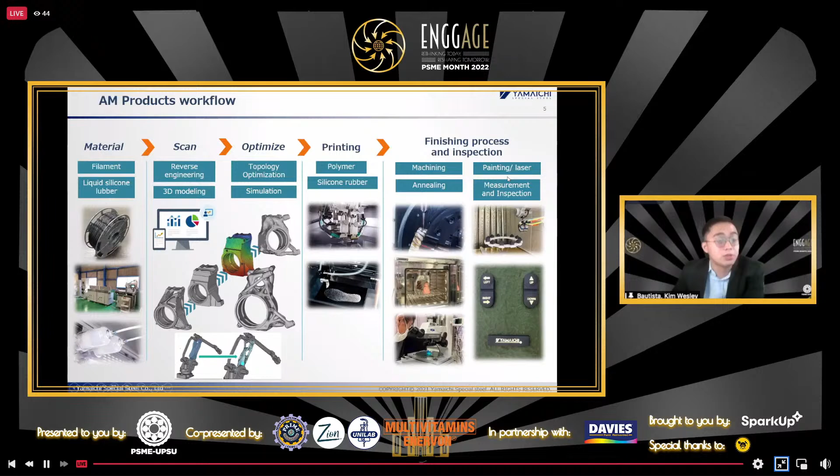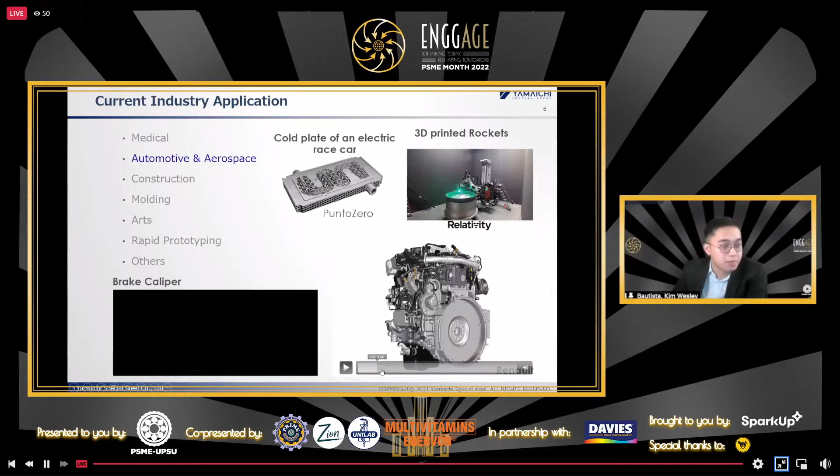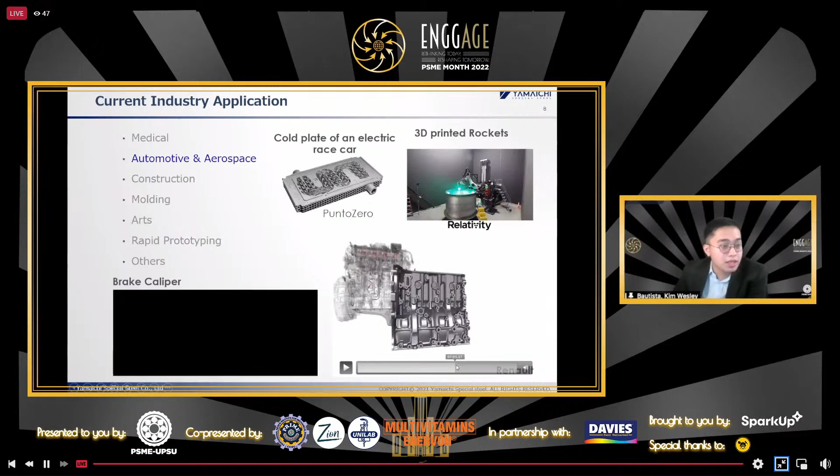For example, this part here, with 3D printing they got 18% weight reduction. This one got 42% weight reduction. This one got 36%, and this one also 36%. They also consolidated parts, from 80 parts integrated into one, and here from 45 integrated into one. So the total weight reduced is 120 kilograms and the number of parts reduced is 200.

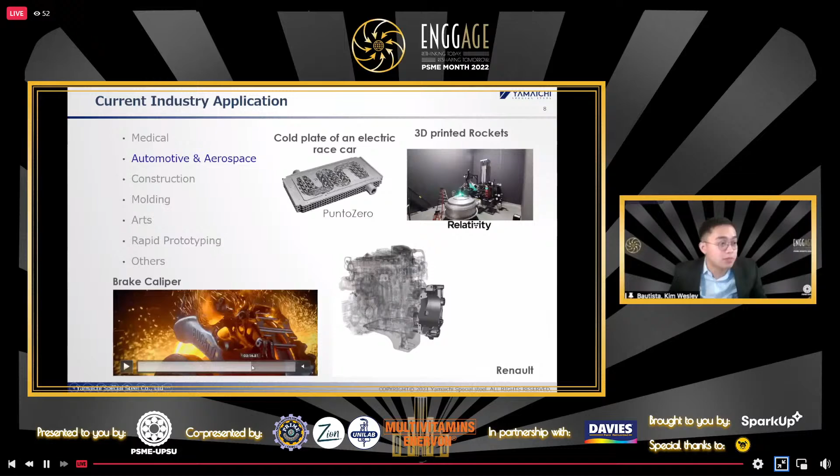Next, for construction, there are companies now exploring 3D printing for houses and bridges.

For molding, this mold has been explored with added cooling channels. Why do we want to add cooling channels to the mold? Because we want higher heat transfer. In molding, the part is subjected to very high temperature, like around 300 to 500 degrees, you pour in molten metal, then cool it down to 80 degrees. We want that process to be fast so it's more efficient, so the mold can produce more parts per certain amount of time.

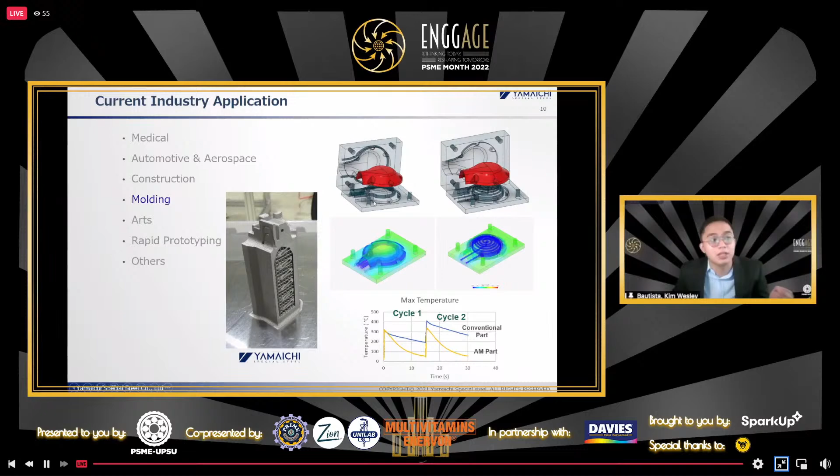Next, because it's easier to manufacture using additive manufacturing, there are also artists whose artworks are 3D printed.

For others, this is a past project of our company. There was a part in their assembly line where the assembly time was very long, like 18 hours. Our company approached them to reduce that assembly time. What we did was reduce the number of parts, from 63 parts down to just 7 parts, and the assembly time went from 18 hours down to just 8 hours.

Next is these speakers. They have ridges at the back, a wave pattern designed in such a way that it can only absorb specific frequencies.

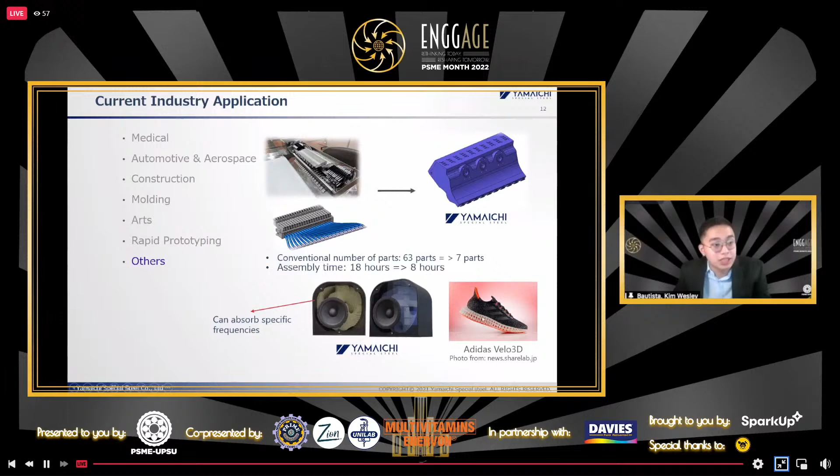Next, why is additive manufacturing different? You can compare here traditionally made versus AM parts. If you observe both, you'll see similarities among the AM-made ones. In fact, it's very obvious when a part is an AM part.

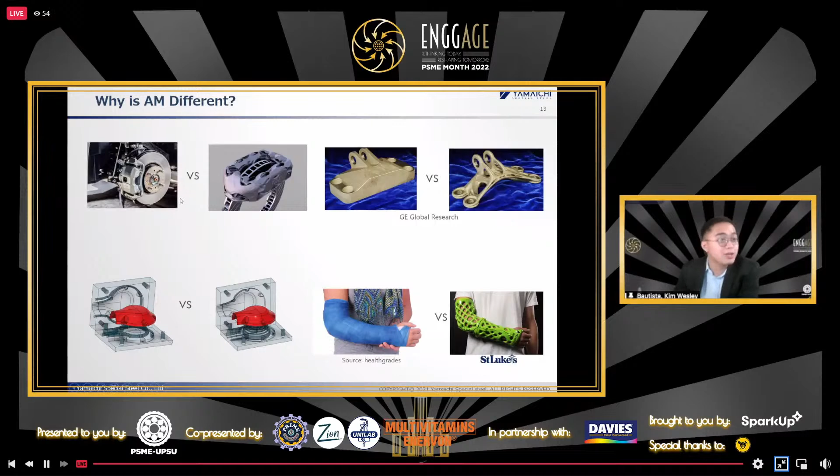Why is that? AM usually has more complex geometry, while traditionally made parts usually have simpler shapes. Why is that? Because in AM we just add material, we're not limited by tooling. So in short, AM gave us design freedom. For example, if you're playing games, it's like additive manufacturing unlocked items that we can now manufacture.

Next, while AM gave us design freedom, there are still some considerations we need to note when designing parts. For example, the printing angle should be lower than 45 degrees so it doesn't create supports, so supports aren't needed. What I want to show here is that there are still some considerations in designing a part. Of course, these rules, these considerations, are not true for all printers, because the development of 3D printers is very rapid nowadays.

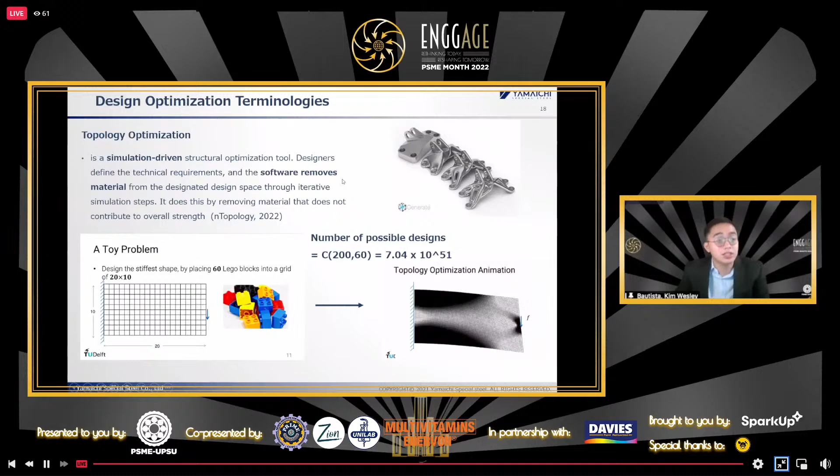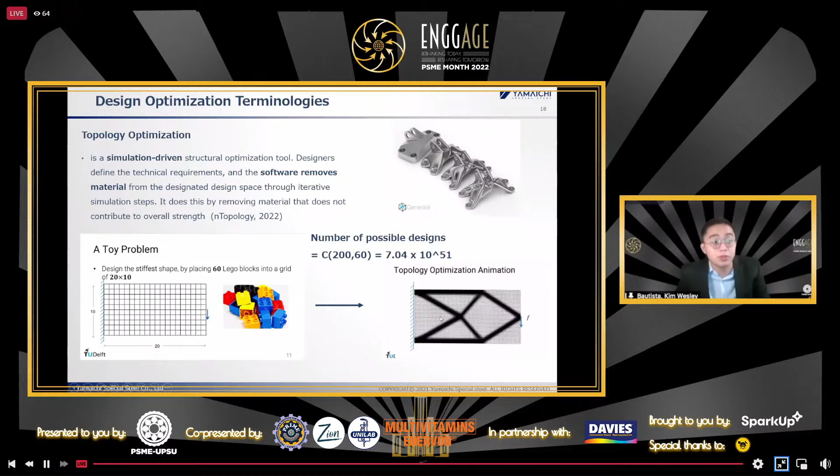So next is lattices. What are lattices? Lattice structures are repeated patterns that fill a volume or conform to a surface. In engineering design, lattices are cellular materials often inspired by nature, consisting of beams, surfaces, or plates that fit together following ordered or stochastic patterns.

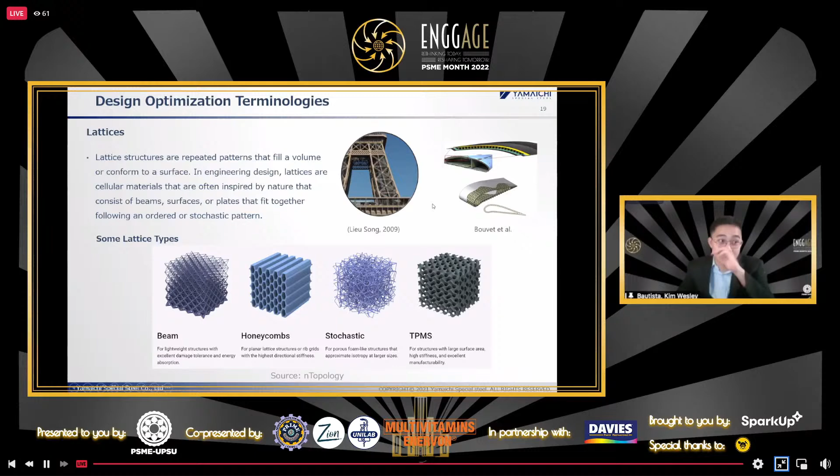So here is our design optimization workflow in our company. When we have a client, usually if they just want to optimize, we start with the CAD they provided. Sometimes we need to create it from scratch. So for example, we already have the CAD, and after that we need to optimize it using the concept I discussed a while ago. So we do design optimization, and from this part, we will lightweight it based on any requirement or specification the client wants.

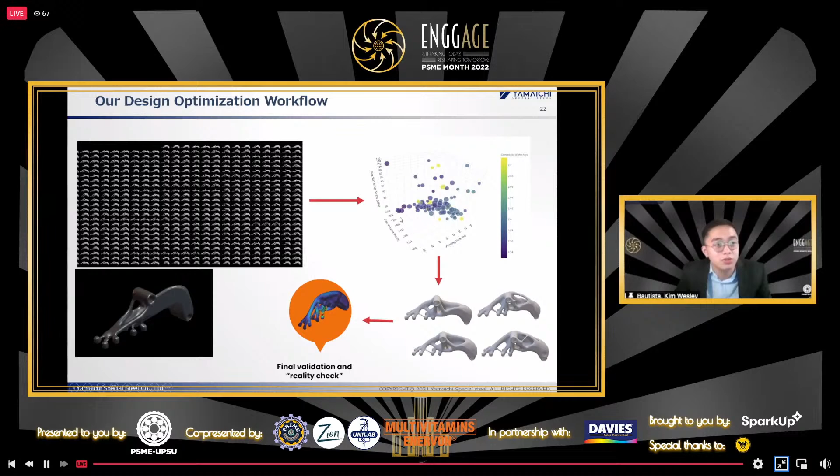So next naman, some samples lang. So ito naman ang gusto natin is to lightweight the design using topology optimization.

For example, may client ka and ang request niya, gusto niya ng robot arm mas mabilis. So dalawang way lang yon para magawa yon. One is to either lakasan mo yung power input mo, of course. Pag nilakasan mo yung power input mo, bibilis talaga yan. Or two, pwede mong i-lightweight tong material na to.

For example, ito lang yung pwede nating i-optimize na part. So ito ay sa n-top. Kailangan mo munang i-mesh yung part mo, and then you need to declare your boundary conditions, kung ano ba yung forces mo, saan ba siya constrained.

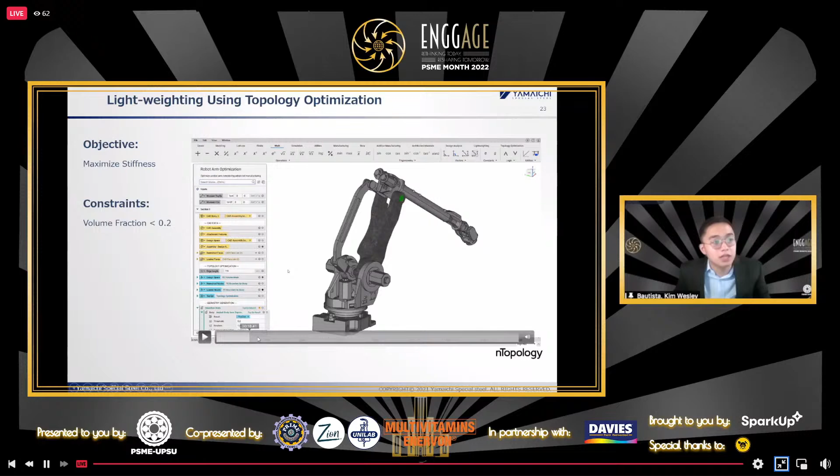At saka after that meron ka ng results. Of course magra-run in a while yung software mo, and then after that magkakaroon ka na ng results na ganito, most likely magiging ganito yung itsura. Makikita mo na maraming material yung ni-remove automatically.

Makikita nyo kung gaano na-reduce yung volume nung part natin. At saka, of course, in every optimization naman na technique, kailangan mong i-post-process yan.

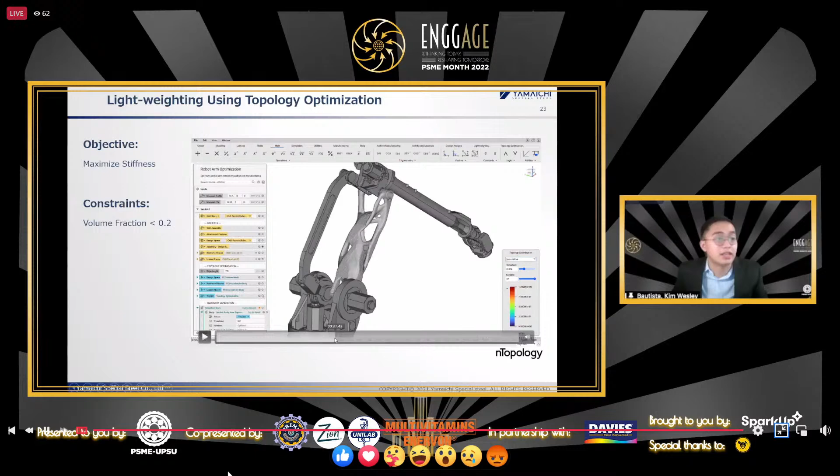So sa case na to, ma-observe nyo na very rough yung part. Kailangan nating i-smoothen yan para less yung mga stress concentrators natin. Ayan na siya.

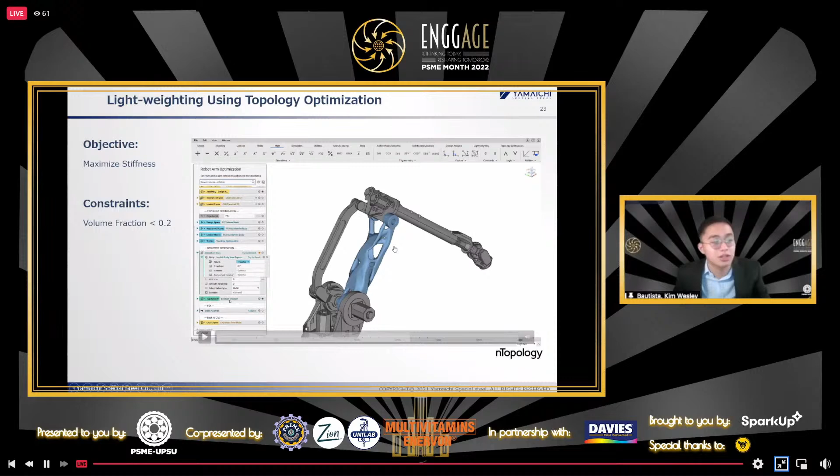Itong part na to, originally, 54 kilograms siya. Then, after optimization, I think naging around 22 kilograms na lang siya.

At saka, of course, meron kang result, pero hindi mo sure kung pasok ba sa design requirements mo. So after that, you need to do some simulations. Check lang yung deformation, check yung stresses. After that, ready for export na siya, or pwede na rin i-3D print kung hindi ka na magpa-final validation and testing.

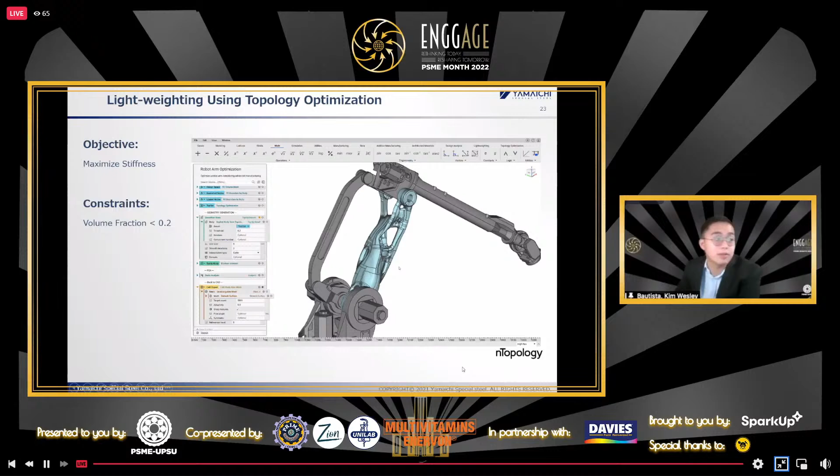So next naman is, ang gusto kong pakita dito is the concept of using fields to drive your designs. For example, meron kang isang bike seat.

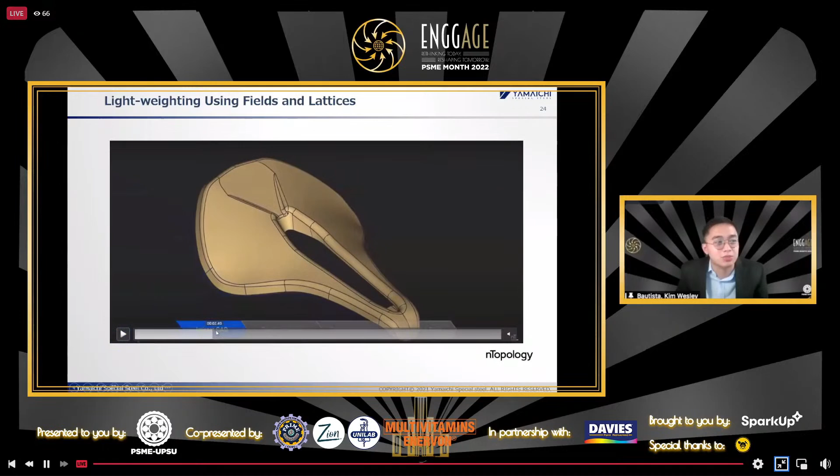Gusto mo ulit i-lightweight. At ang initial na gagawin is to do simulations kung ano nga ba yung mga stresses mo, para alam mo kung saan yung part na pwedeng bawasan or pwedeng modify. So here, ito yung results mo.

Dito, kitang-kita kung saan concentrated yung stresses. I'm not sure if this is stresses or strains. So ito yung results mo.

At gusto mo gamitin yan to drive your design. Sa software na ito, madali lang siyang gawin. Pwede mo siyang parang i-code na, for example, if your stress is this high, ganito yung corresponding na gagawin mo. If your stress is low, ganito yung corresponding na mangyayari.

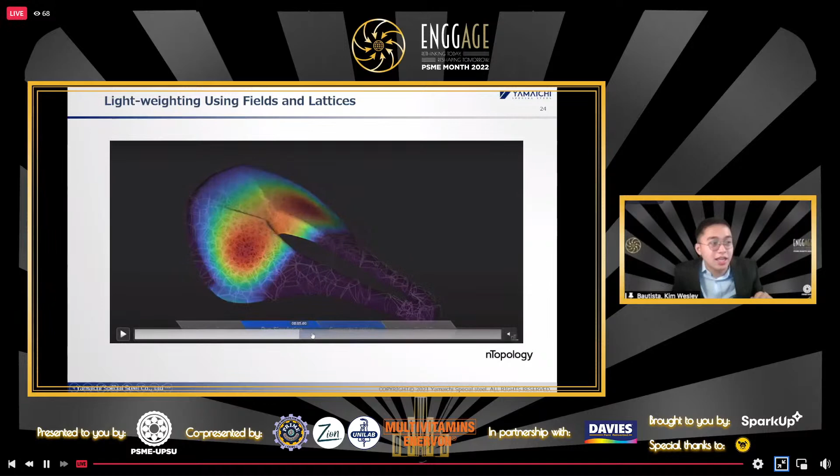So sa case na to, nilagyan niya ng lattices yung bike seat. Dito parang yung code natin, if high stresses, high density yung lattices mo. If low yung stresses mo, low density yung lattices mo. Bakit ganun? Of course, pag high stress, mas kailangan natin ng material doon na magsusupport.

So ayan yung itsura niya. Kitang-kita dito na yung high stresses, mas maraming material compared dito na low stresses. At saka you need to post-process it para mas maayos. So ito na yung final part mo.

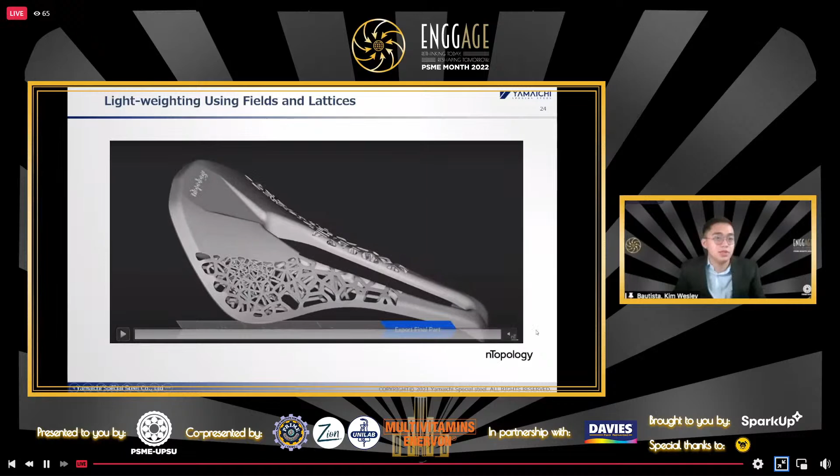So next naman, pwede mo rin siyang gamitin if for example you want to make a custom-made na shoes. For example, meron kang pressure map ng paa mo and then gusto mo na comfortable yung shoes mo, magaan, and at the same time nagko-conform sa shape ng paa mo yung shoes mo.

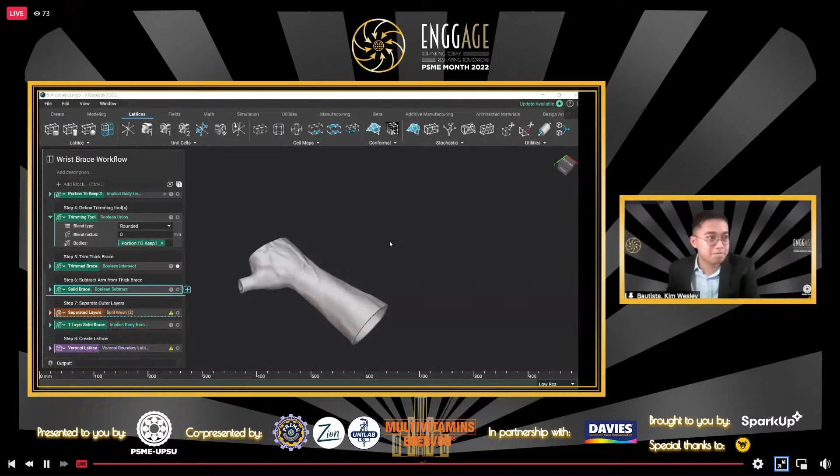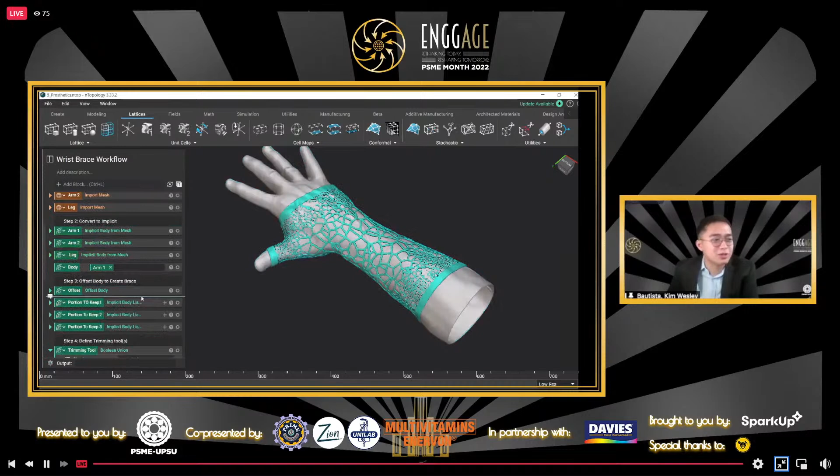So, for example, you have a scanned copy of your arm, in a hospital setting, and you want to make a prosthetic like this one. Of course, the prosthetic should conform to the shape of the arm. So let's process it a bit - the process isn't too important here, but just to give you an idea. Declare the part that's important, where you'll put the prosthetic, and then do some processing. You trim it.

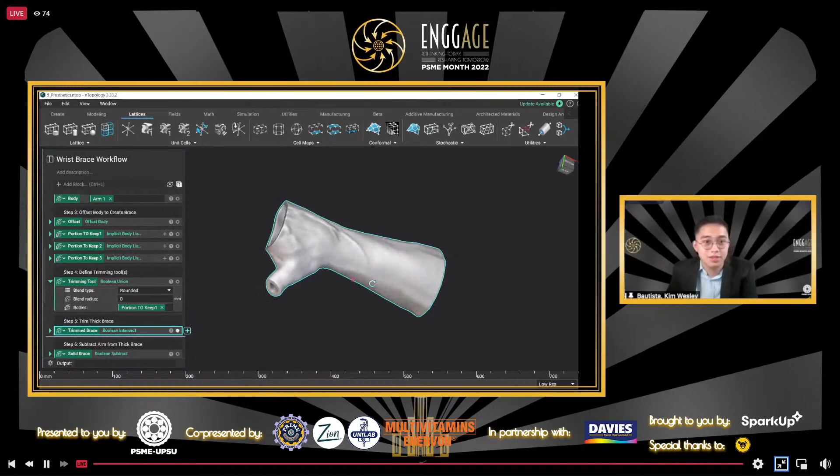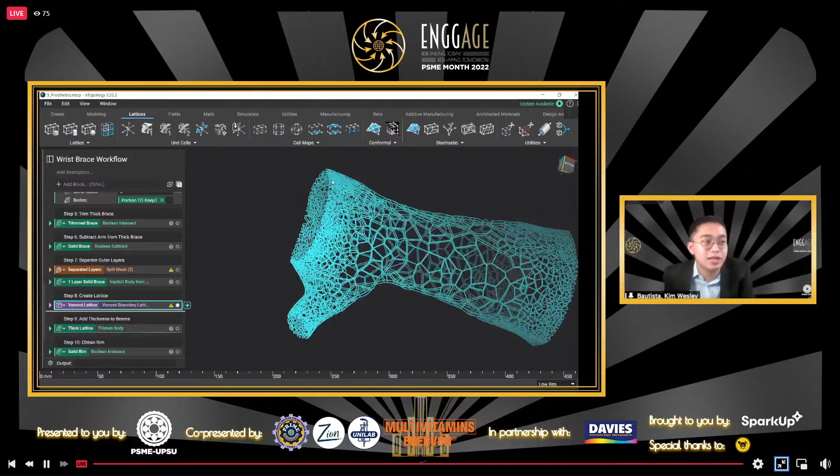And of course, we want the prosthetic to be lightweight while having good airflow. So we need to put a lattice there. Now, in the lattice code or program, if the lattices are near the edges, they become denser. Why is that? Because the stresses on our prosthetic are concentrated at the edges. Then do some post-processing, add something, and here's your final brace.

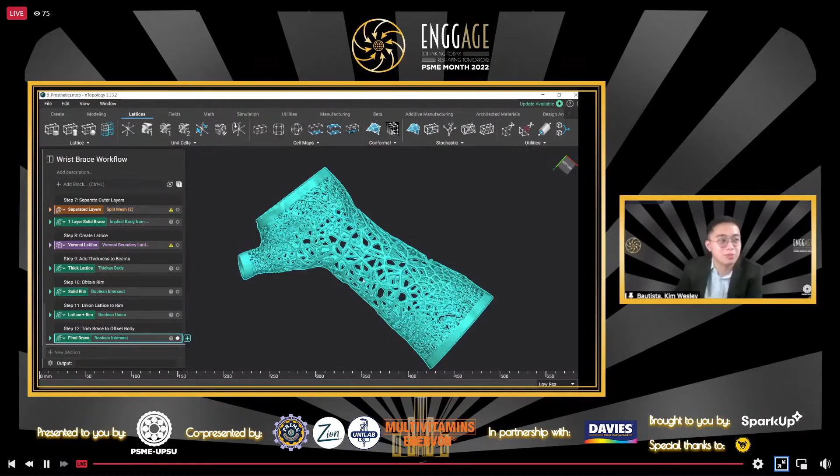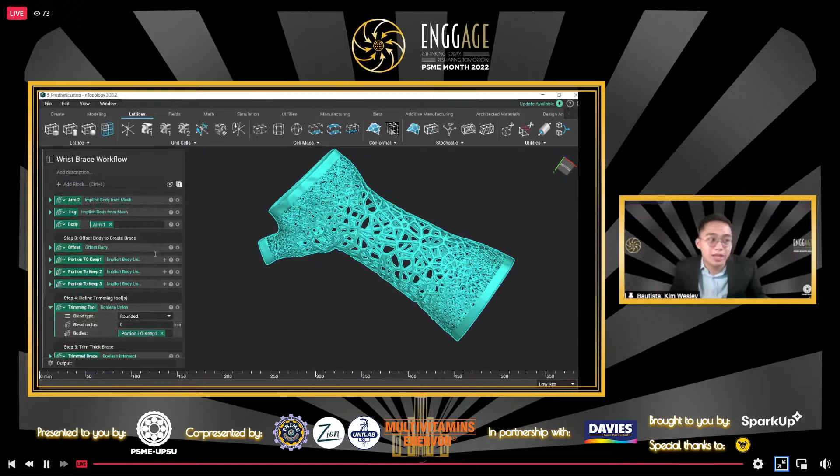But don't you see how inconvenient this process is for a doctor? For example, if he has a new patient, it's such a hassle because he'd have to redesign everything again. No doctor can do that - redesigning every time there's a new patient. So here, I introduce the concept of reusable workflows. Here at NTOP, and not just in NTOP, you can automate this in other software too. When you change a parameter above, your code automatically reruns - all the steps you did previously run automatically.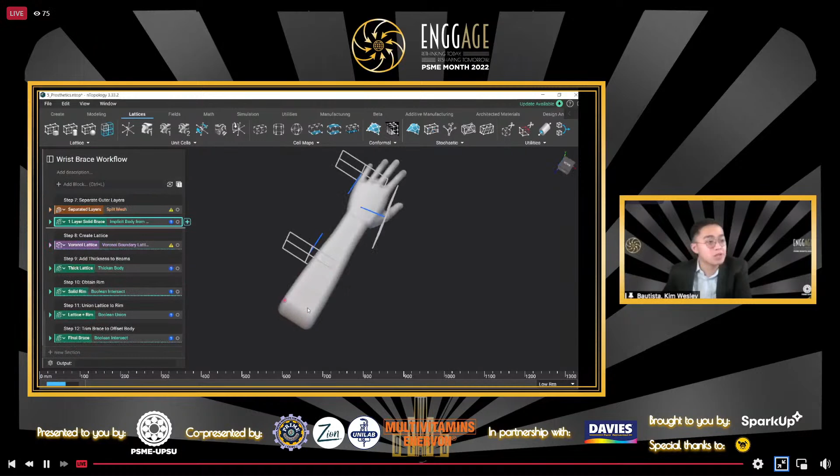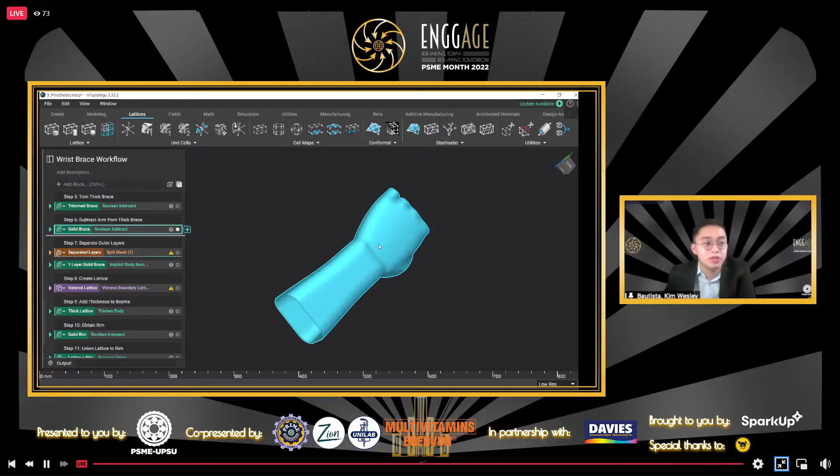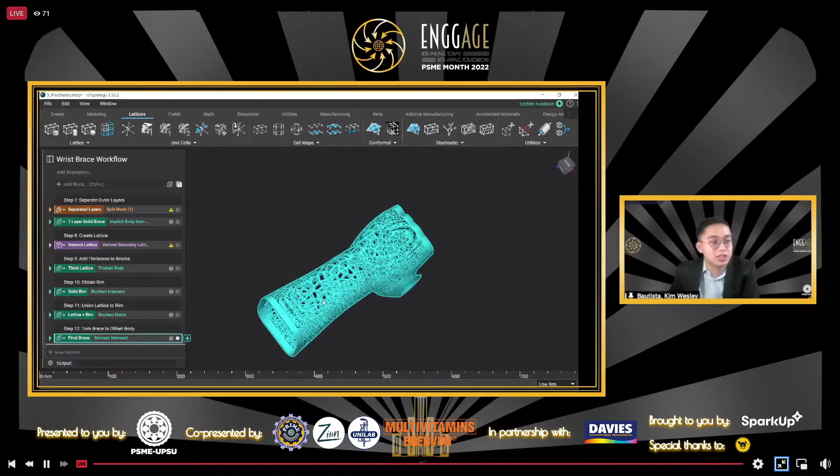So what is implicit modeling? To represent this CAD, traditional CAD stores every vertex and every edge of the design. Here, the process is different - it stores equations that represent this CAD. And then, that's it, it's done. This is our new arm. So where's the original? Without doing anything else, we just dragged a few parts, and now we have this redesigned arm.

So this is the concept of optimizing the way you design things. For example, it's not just the hand that needs a prosthetic - the foot, the leg, also needs one. The process is the same - just drag this down and declare the portion that needs the prosthetic. Then wait again, about 30 seconds.

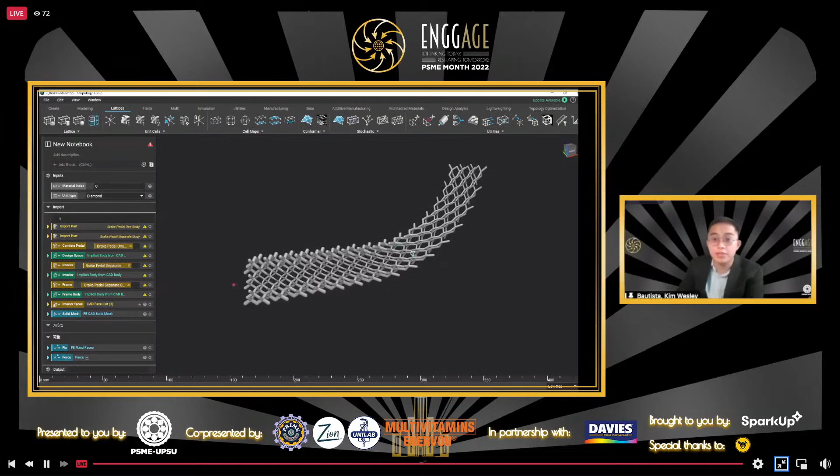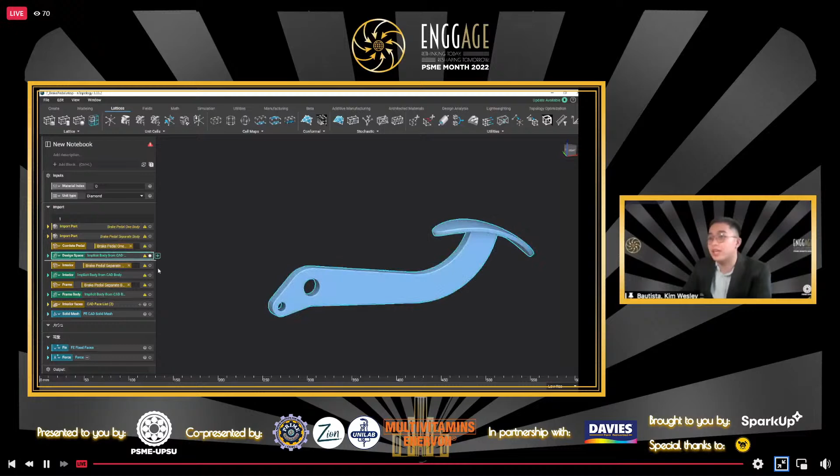Okay, so for example, we have a brake pedal we want to redesign. What we want here is to lighten the body, because, for example, it's for a race car, so weight is very important - it's important to reduce it. So here, just declare your parts - what can be optimized. In this case, the client said this inner part can be optimized. So just declare it a bit, turn it into a mesh, and then do some simulations.

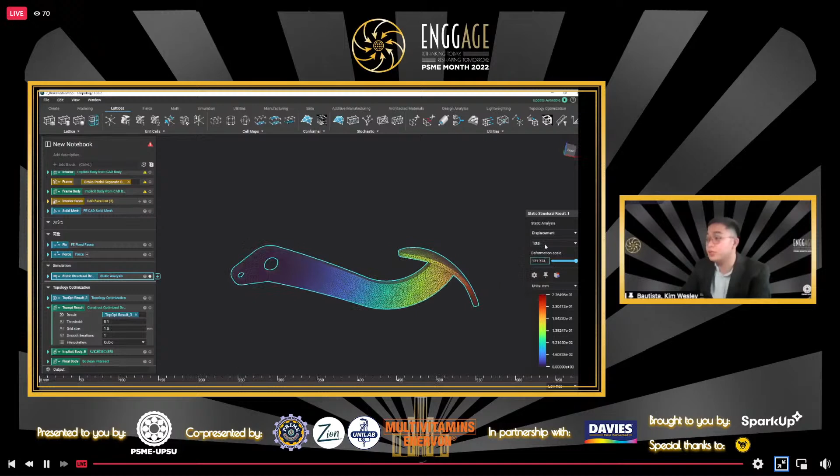So, ayan, kita niyo yung parts kung saan highly stressed. Itong mga yellow-orange part, highly stressed yan. So parang meron na tayong idea kung ano yung pwede nating i-modify na part para less yung stress.

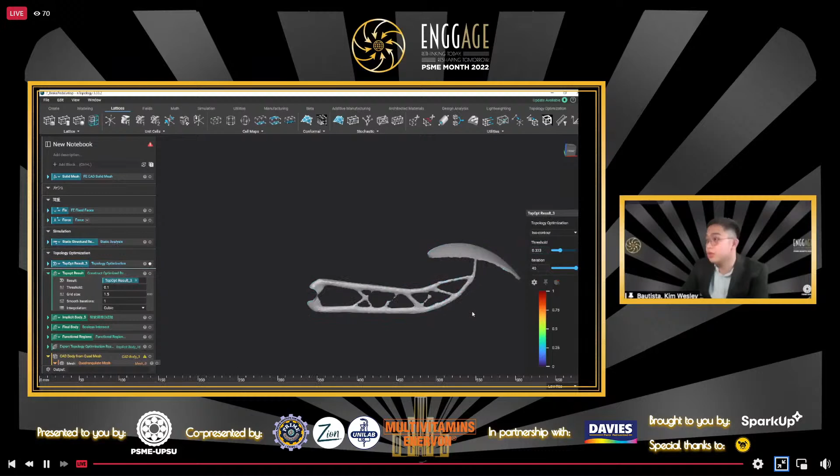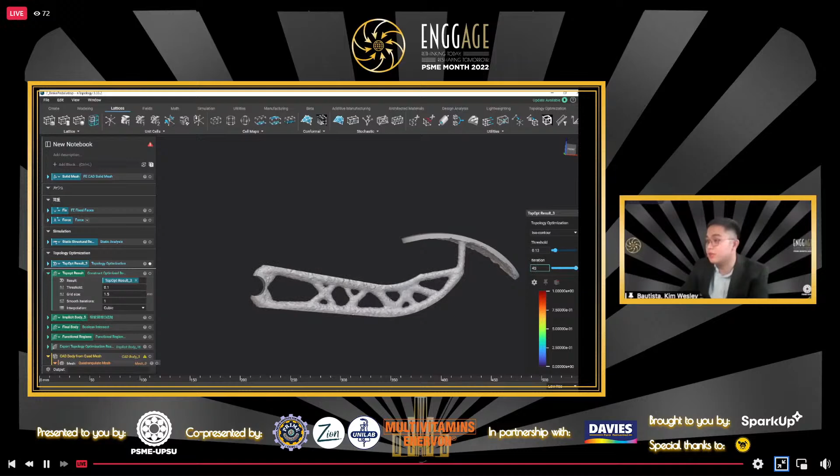Then do some topology optimization. Topology optimization is like setting up your simulation. Lalagay mo lang ulit yung stresses mo at all. And then meron tayong results. Pwede nating i-tweak kung ano yung gusto natin, gaano kalala yung pag-remove ng material. Makikita rin natin dito yung iterations. So nagta-transform yan to achieve the optimum design.

And then we can do some post-processing. Ayan, post-processing. At saka ito na yung final body natin. Pero of course, minsan hindi tayo satisfied sa result ng topology optimization.

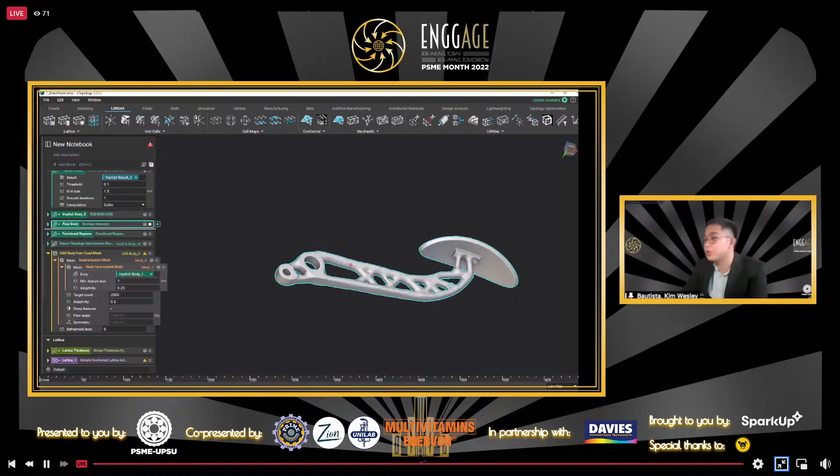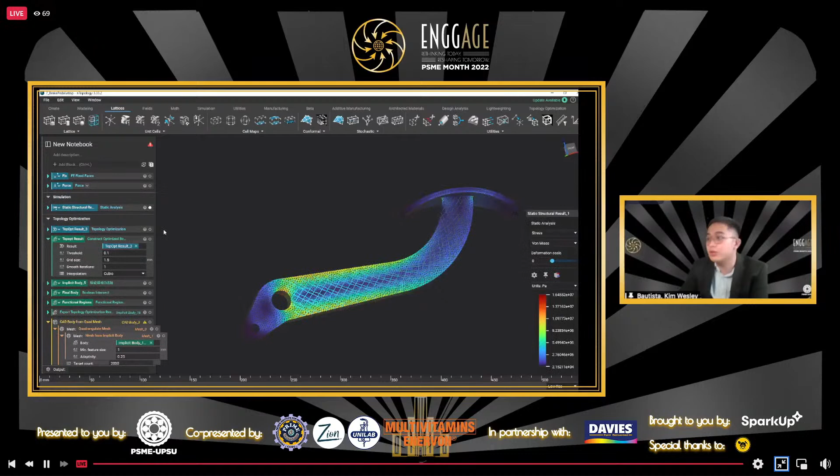Minsan gusto natin mas manual, so for that we would use lattices naman. For example, may lattice tayo here. Maglalagay tayo ng lattice, for example, itong lattices. At mayroon tayong simulation results kanina, di ba? So meron tayo niyan, alam natin yung areas of high stresses.

Dito naman, kukunin natin yung values niyan para alam natin kung saan yung part na pwede nating patibayin. So ayan, yung thickened part. Makikita niyo na thickened kung saan yung highly stressed.

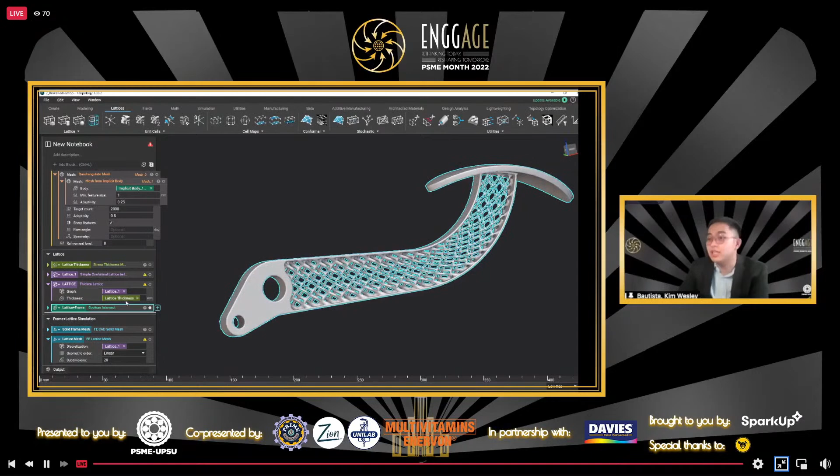At of course, hindi tayo pwedeng mag-stop lang diyan. Kailangan ulit natin mag-simulate and check again the stresses. Ito yung displacement, ito yung stresses. Makikita niyo dito, lumipat na ngayon yung maximum stresses, from gilid, nasa gitna na.

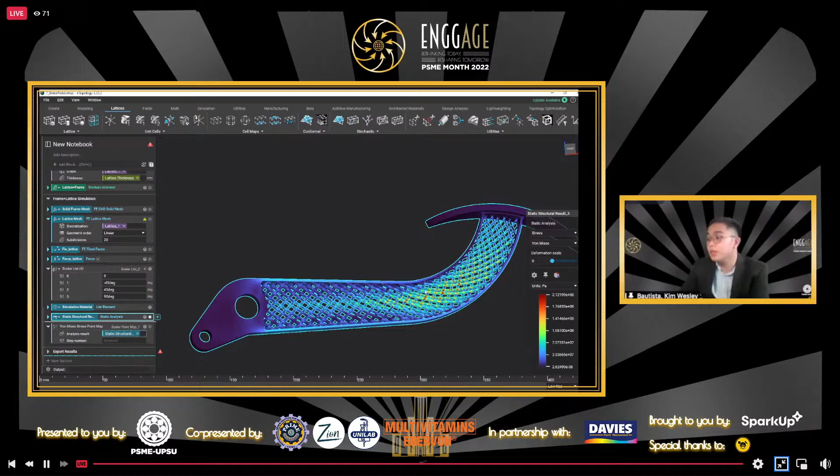So kung kailangan mo, for example, i-redesign pa ulit para mas maganda pa ulit yung part mo, pwede mo ulit itong gamitin to know where, yung kung saan yung parts na i-edit mo ulit. So ayun lang, balik tayo sa presentation.

Wait lang. Ayan, kita pa. Ayan, so yun lang pala.

Sana ma-excite kayo kasi parang before, sobrang, pag may idea ka, very hard to make it to a reality. Like paano ka gagawa ng mold, ngayon mag-3D print ka na lang. Tapos ngayon, pag mag-optimize tayo, hindi naman natin kayang i-manufacture, pero ngayon kaya na natin. And then we have some computers to do it.

And then we also have some software na developed na to do it. Sana makita niyo on how lucky we are that we are living in this time wherein pa-develop pa lang itong mga technology na ito at pwede tayong mag-ride doon sa development na yun. So very important yung mga naaral natin sa classroom na mga theories. Thank you for listening, goodbye. Then may Q&A pa, okay.